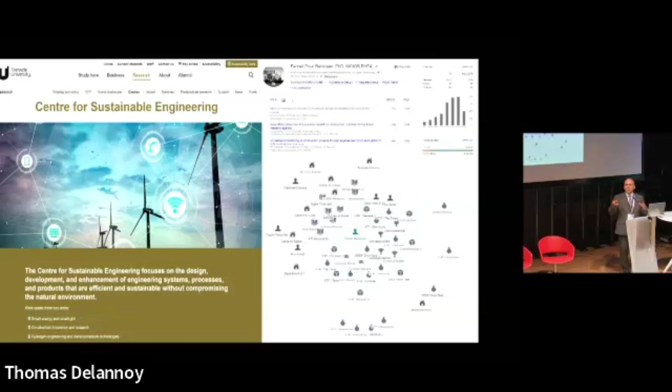Okay, why do I have such a very convoluted title? It was blockchain, digital twins, multimodal, data-driven, everything. And this can tell a little bit of the background. Because of my role in the center, having 100 staff working in the center and being involved in several initiatives, this dragged me into so many projects that I somehow found myself in the position to have to contribute to the university and the center. And that just dragged me gradually from being an architect to construction, from construction to a digital engineer, and then from there to decarbonizing leader. So this is the story. So don't take me wrong if you see I'm just dragging from one place to another place.

What happens in the Centre for Sustainable Engineering in Teesside University? We are following exactly the same strategic pathways of government of UK and probably all over the world in terms of having decarbonization and digitalization as 2 important pillars of development. And we are just, again, aligned with government strategies and policies. We made a new investment of £16.4 million as a starting point, and it will escalate to 50 million for our brand new Centre for Net Zero Energy. And basically, we cover all the aspects of decarbonization, which are power, transportation, heat and building, hydrogen, industry, CCU, and etc.

I was having a chat with Alan yesterday, and there is a big consensus among everybody in this field, that we cannot just focus on one thing and get ourselves busy with technology and forget what that technology brings to us unless we have that human dimension taken into account, and unless we see it as part of a big picture of what I'm doing and how it contributes to that big picture.

In the center that I lead, we have these 4 main research groups: digital health and engineering, smart energy, hydrogen, and circular economy. Most of my work that I'm going to show you, as much as I can, because Zubair cut another 5 minutes of my presentation before I start, so as much as I can, I try to cover them. So if you see the slides are passing a little bit too quick, blame Zubair, not me.

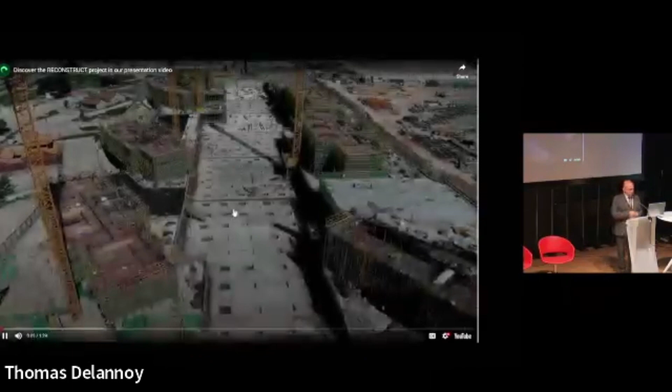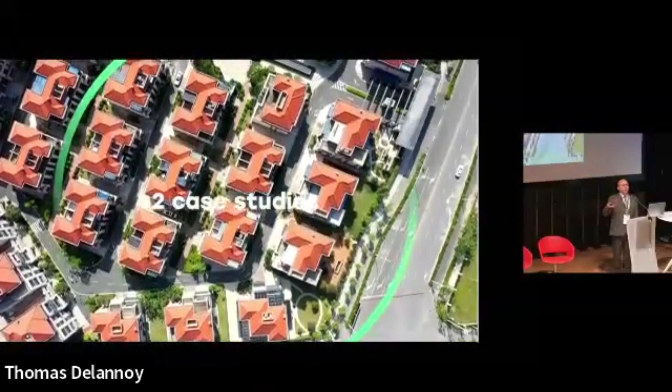As this theme of this conference is about circularity, we are proud to be part of one of the two European projects on circular economy and circular construction we launched last year. And what we do in Reconstruct, our focus is on circular construction, on waste minimization, waste identification, and waste reuse. Because, as I believe, and my stats in the journal shows, the most prevailing theme for research, maybe for the next 10 years, is about how this digitalization is going to help the decarbonization and helping the integration to get rid of all these damages that our construction industry gives to the environment.

If I pass to next slide, if I may. I always have problem with YouTube.

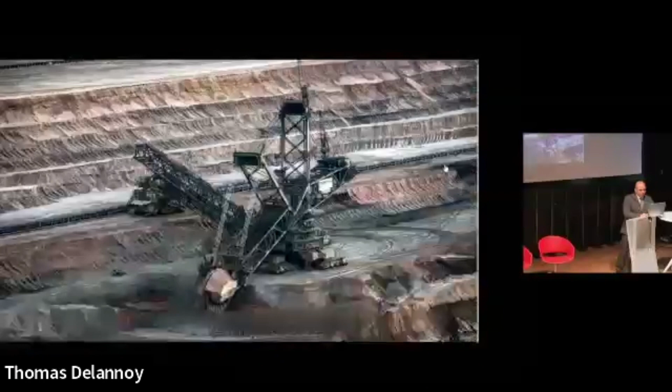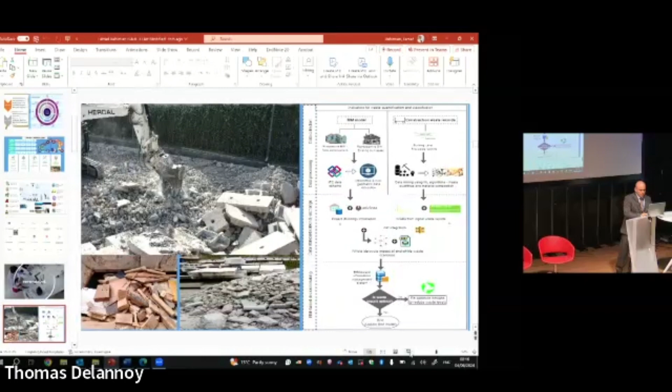Our role in Reconstruct is we look after the social science and humanity part because it is, we believe, one of the most important ideas. Again, we were talking to Alan yesterday, and it's about the design logic versus the user logic. We as the designers, engineers, we have dreams about what we do, but what is on the user side? How do they perceive our solutions? And this is one of the biggest roles that we have in Reconstruct.

We also look after AI for the detection of waste and quantification of waste, which is a very, very difficult task again for us because of the problem with manual labeling.

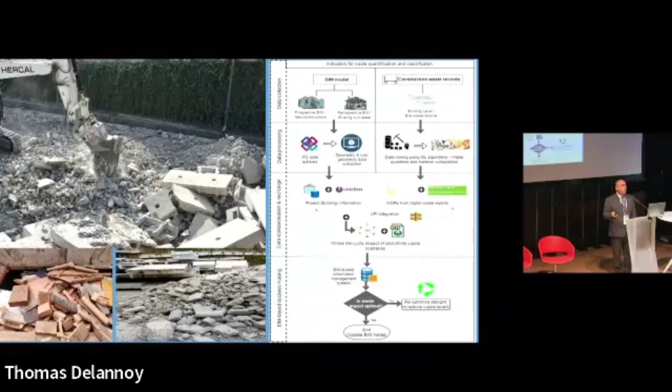Again, we're using active learning, we're using transfer learning to overcome this problem. And we're also looking at integration with BIM for waste quantification and waste minimization.

In terms of how I see my own work in terms of digitalization, we published a paper yesterday, and the QR code is here, in Production Planning and Control journal, which is a very popular journal. Basically looking at the technologies, what I try to emphasize before I show so many tools...

...and the toys, is that when we look at the people-process-technology framework, what we see is that technology is very visible, very disruptive, distracting, but the important parts are the people and process underneath, which are most likely neglected. Referring back to Professor Bach's presentation yesterday, if we want to make a revolution, we should really emphasize and focus on what our technology and tools are going to offer to people.

...and improve their processes. One of the interesting projects along that line, as I showed, is 3D, 4D, then digital twin and blockchain, and I'll just go through consequentially to cover some of them. One of our award-winning projects that we started in 2017, and we're happily still continuing working with the same company.

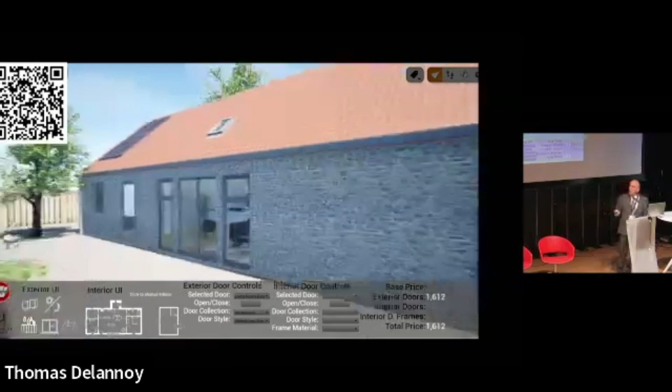Northcott is a timber frame manufacturer in the very north of Scotland. With this project, we tried to help the customer, who is a very savvy company with a lot of resources. They can triple their production without any penny of investment, but they always have problems with procurement and recruitment of projects because they are very far away.

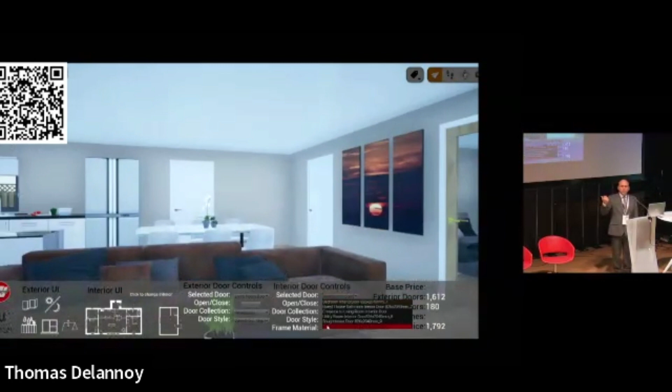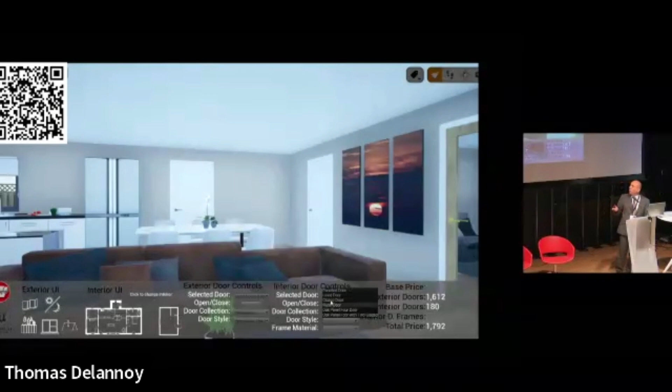This is not a mass production cheap houses solution. This is mid-range, what they call self-built, this kind of IKEA type - you get the kits and put it together yourself. They always had problems recruiting projects because it's not an easy task to convince a client who is investing £300,000-400,000 in buying a kit that this is going to be their dream house, without even having any idea by looking at conventional architectural drawings.

By use of open BIM and gamification technologies, at that time we created a design configurator, similar to what you see these days in kitchen design manufacturers. They offer - you sit down with a mildly trained member of staff, marketing staff, and they take you through the design, and you see everything. Once it's done, you get all the costing, all the features there.

I passed that slide because I didn't want to miss this one - I don't know if you noticed, all the components were showing underneath, all the price implications of the changes. And what happens is we also have this kind of drag and drop modular furnishing for the space, to give them a showroom feeling.

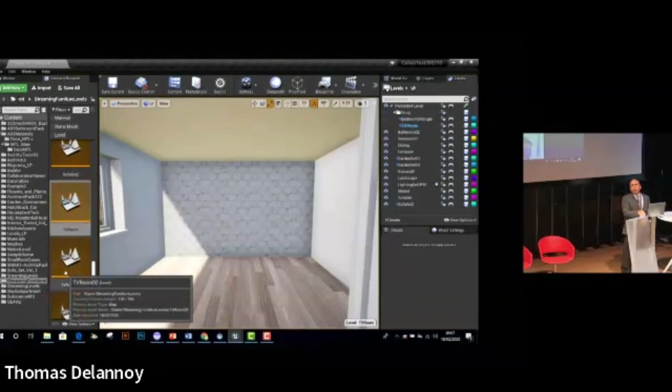Finally, we received two very prestigious awards in 2018 and 2017 for this project - it was the Innovation of the Year Award by the Scottish Government, and the Building Smart International special distinction. As I said, we are continuing to work with the same project, but at a different level.

This is where we get into the digital twin stage. I was having a very nice and long chat with my fellow senior colleague, Nick Nisbet - probably most of you might know him. Nick is one of the fathers of digital, anything digital, in the world.

He led Building Smart for some time, he's leader of the English-speaking chapter for Building Smart, and he is the creator of Singapore Planner. We were just wondering, because we were attending this digital permits conference, everybody was talking about digital twin as if we had that ten years ago, without even making any distinction. I still fail to understand how people claim they have BIM adopted, but now people even claim that they have adopted digital twin without ever seeing any bilateral data flow between their models.

So what we see the digital twin as is basically, most importantly, starting with the definitions and the ontology setting, the structure of the digital twin, then IoT systems. Without IoT systems...

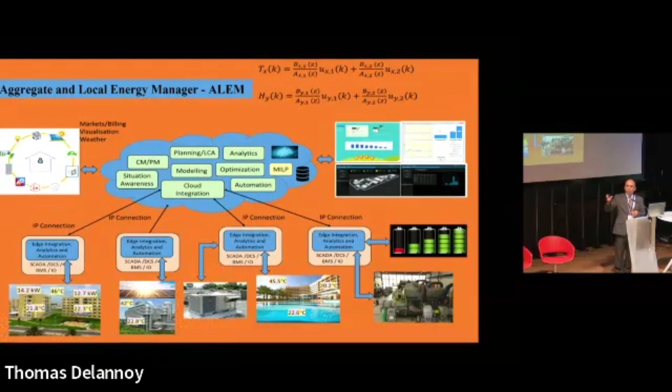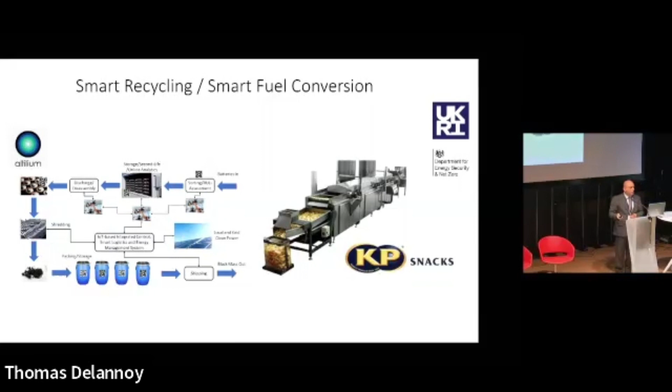What happens is, as I mentioned, having an integrated but vertically and horizontally scalable system gives you full cloud integration, data provenance and governance, and multiple networks of local energy management. This was another project we did for KP Snacks, a producer company, to optimize their energy use.

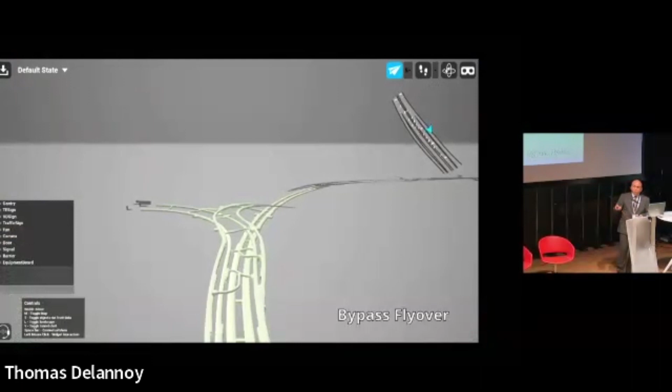I have to pass quickly on these, maybe in another conference. This was one of the most interesting works that we've been doing so far.

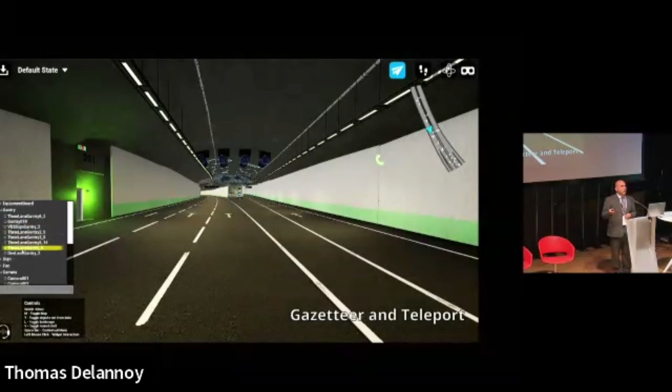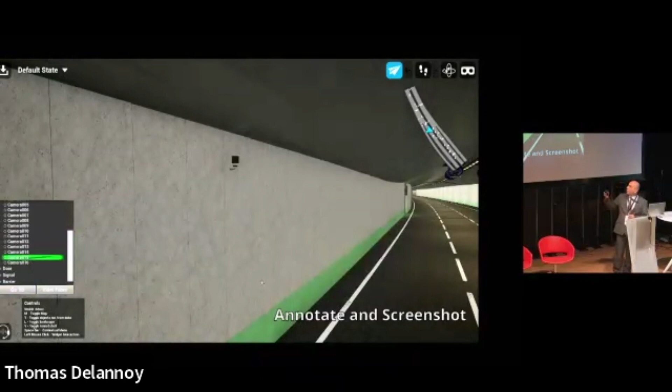This is the world's second longest city tunnel, Stockholm Bypass. With our client, we've done a full digital twin of the tunnel for their client. It is data-driven and shows all the components. You have IoT connection to the barriers, the cameras, to everything, and even the signs, which could be controlled. This is for predictive maintenance and inspection.

It shows if information on a panel or a camera snapshot is missing, and this has been a game changer for the client. They told us they saved €1 million last year only because they had this in their project reviews, without having to stop the tunnel and take trainees to the site.

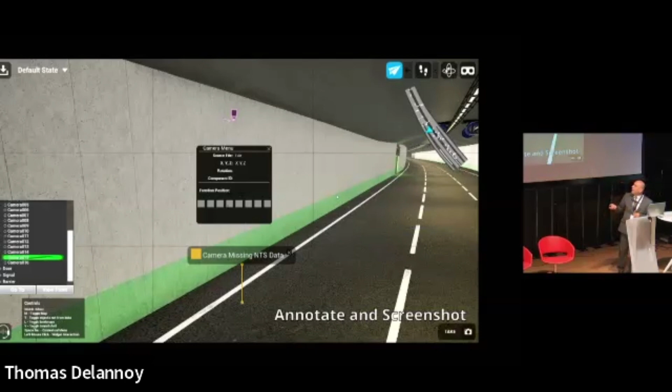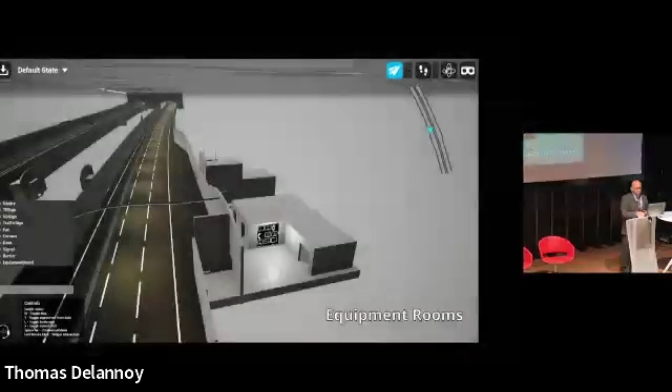If I pass it a bit quickly, this has an X-ray mechanism for showing what is underneath, for controlling the signs, and for prioritizing the routes. What prioritizing means, I'll show you in the next slide.

As a byproduct of this project, we started another project for prioritizing bus routes, which is what you can do when you have data. We have the bus GPS data, the bus stops, and the junctions. We segmented the bus route, analyzed the data, and did some exploratory analysis of the delays and journey times.

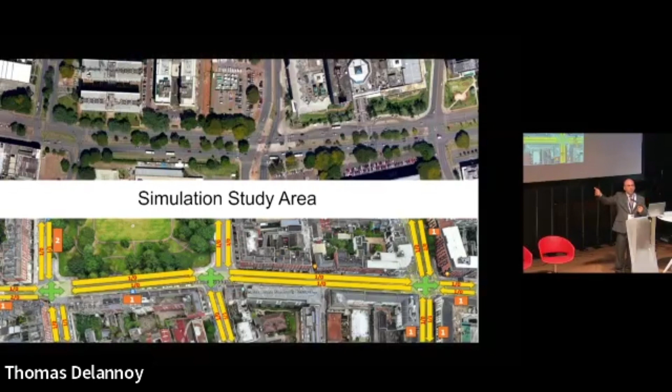We did prediction and visualization of the length of each segment for the bus, and managed to do optimization by prioritizing the paths. Imagine if I see a lot of delay on this route, I can control the traffic lights and allow the bus route to be faster. This is a trade-off, adding to the traffic on the other side but cutting it on the critical one.

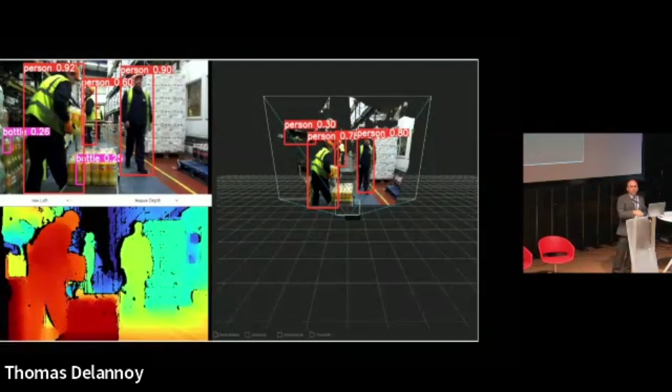We had another project, in a nutshell, using AI for image processing for warehouse management and logistics optimization, because so many problems happen in food delivery. Without going into detail, happy to discuss it in the Q&A.

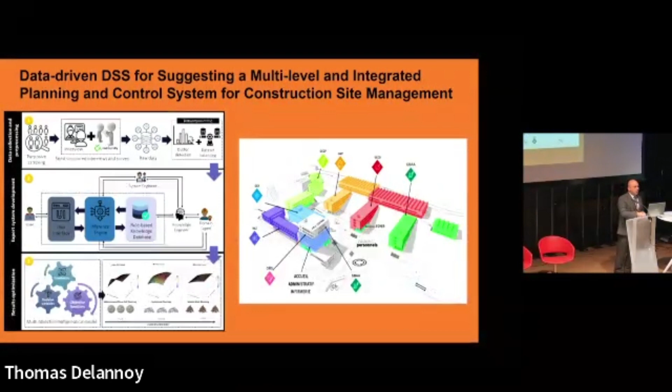We had another groundbreaking project already published in Automation in Construction and another good journal. In this work, we had the few-shot learning problem. We had another best paper yesterday presenting almost the same concept: when we have a problem of scarcity of data, how do we manage it?

We used this system for heritage preservation. We drone scanned several heritage sites and tried to extract the DNA from these sites using a discriminative machine. If there's any interest, please have a look at the papers. Happy to have a discussion.

Finally, large language models and natural language processing is one of the newest streams we started working on. We already had a very successful project with a roof design company. They have a lot of correspondence in their roof design between designers and clients, and hundreds of design hours are spent reading emails and extracting information. What about using simple language libraries or even ChatGPT to extract this information from PDFs and emails and bring it to the forefront of the designer?

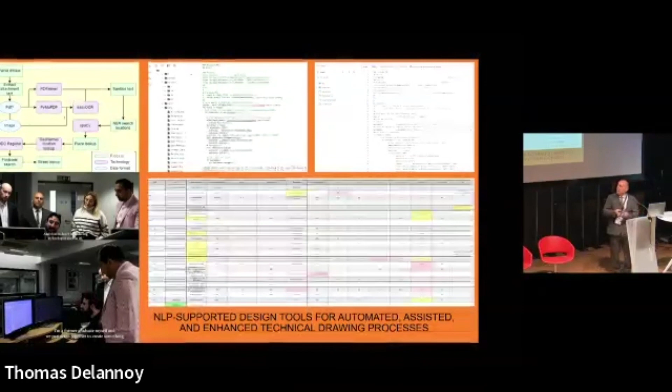The project, as I said, has been successful. We are signing a contract for another, longer one.

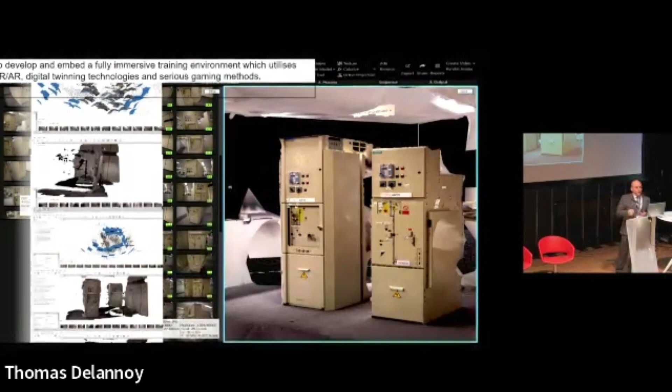My most favorite theme is immersive technologies for health and safety training, which has involved partnering with several companies and institutes for this type of research. This one is very interesting because the company we're working with, Faraday Training Center, gives training to the big players in the world in electronics and electrics, from Cisco to Siemens and others. But the problem with high voltage, high risk applications is first, the risk is very high.

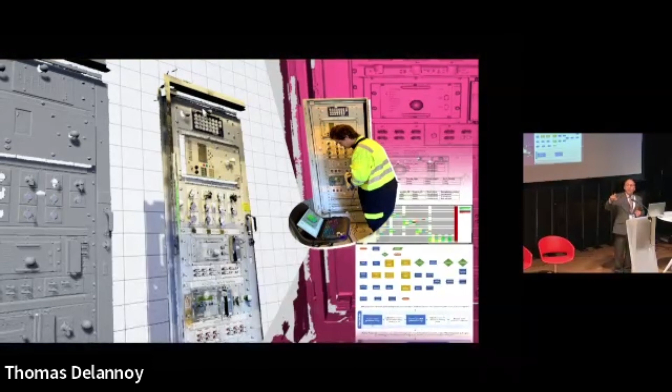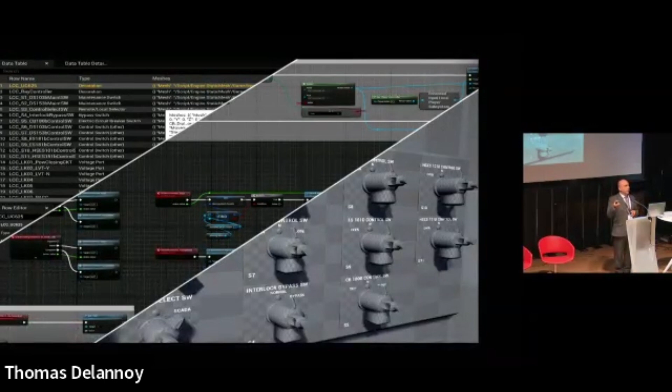Second, the switch gears themselves are very hard to acquire, even if you're prepared to pay hundreds of thousands of pounds. With this, we made a digital twin of every asset and put the curriculum on the game engine. Trainees have a chance to play with it, even taking into account haptic devices for a full immersive feeling, as if they are playing with a few hundred thousand pound switch gear. Once they've done that, they only need to use the real switch gear for certification.